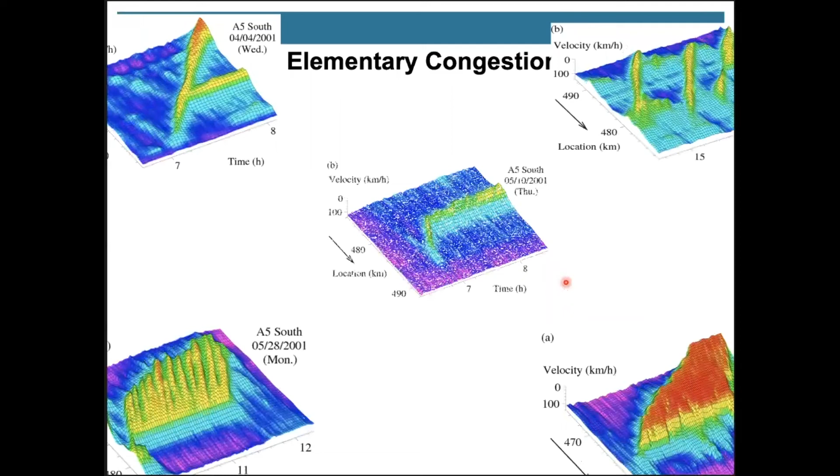Right now, we're summarizing again those congestion patterns, and it turns out that all those congestion patterns can actually be reproduced with relatively simple traffic flow models, such as the intelligent driver model, but also others. And we can reproduce surprisingly many different kinds of congestion patterns with the same model, even the same model parameters, apart from changing the inflow into the system, both the upstream flow and the inflow through the on-ramp.

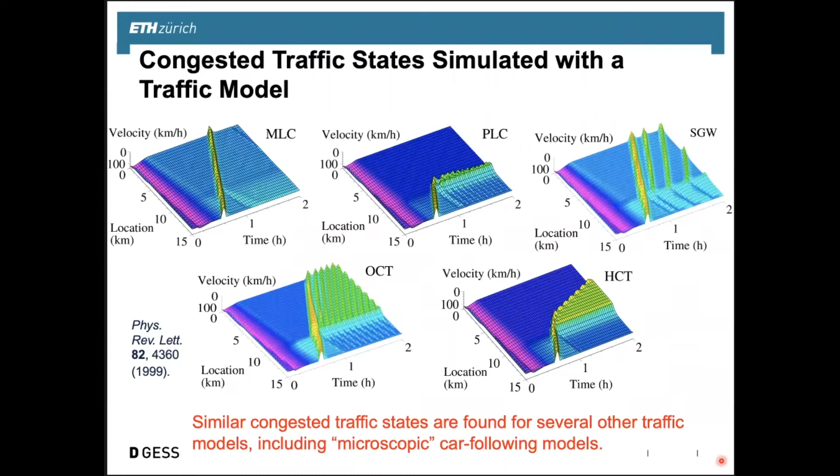And we have also different outcomes for small perturbations in the traffic flow and for large perturbations in the traffic flow. For large perturbations, you can have those additional traffic patterns, moving localized clusters and pinned localized clusters, right? Like what we have just seen with the overtaking trucks in a sense.

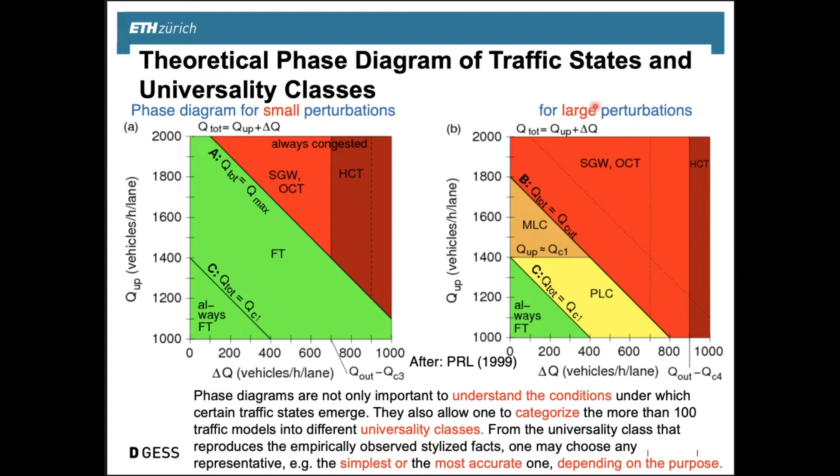So those are predictions, and the fact that for the same flow conditions, we can have different outcomes depending on the history of the traffic flow is represented by the wording that we have a multi-stability in the traffic flow. Okay, there could be different outcomes, in other words.

Now here's one of the papers you may want to look at and maybe even present to the class later on. The interesting point is that there is empirical data, and that empirical data actually fits the simulated data quite well. I should say that the simulation of the traffic patterns occurred before we had evaluated that empirical data, and so from that point of view, it nicely anticipated the findings in the empirical data.

Large and small perturbations. You have small perturbations when there is a little variation in the density along the freeway. If there is a large density compactification at some places, like a platoon of vehicles where there's little distance between the following vehicles, this is a large perturbation, right?

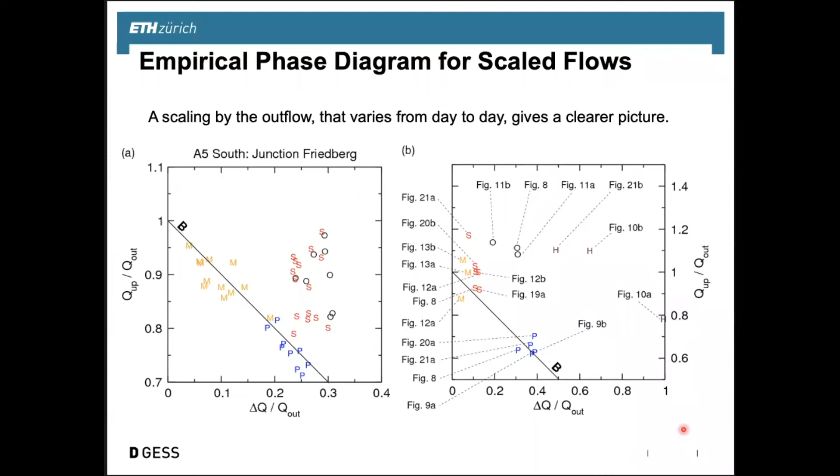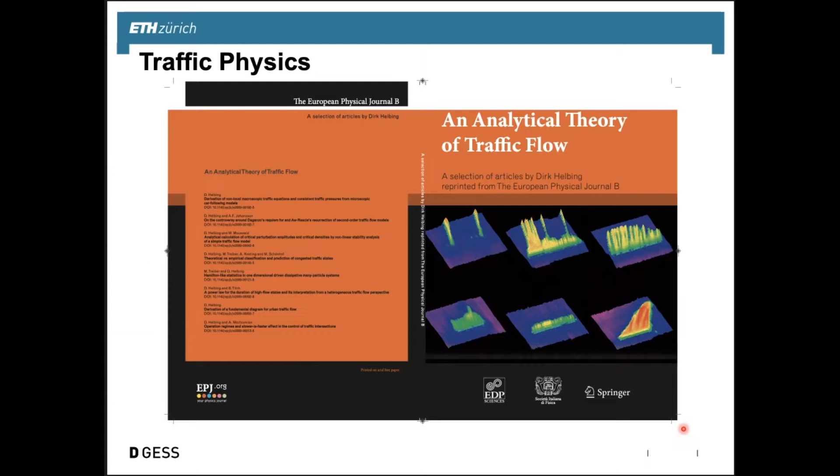Is that clear enough? Now, in the meantime, we can say there is an analytical theory of traffic flow. And this allows us actually to understand many of the phenomena that have been observed and their characteristic features that can be found in the empirical data, and what are the conditions under which what kind of phenomena can be observed. Plus, we can actually calculate the extension of congestion patterns and the associated travel delays, okay? I mean, travel times, in other words.

This can all be done once we know when traffic starts to break down, which is, however, a stochastic process. So we can't anticipate exactly when one truck will overtake another truck, and these kinds of stochastic events will largely determine the moment where traffic flow breaks down. And that's why you want to avoid breakdowns in the first place and delay them as much as possible if you cannot avoid them. And now the question is, how can that be done?

And once we have understood the reason why and how traffic flow breaks down, actually this can inspire new kinds of adaptive cruise control systems. We've developed one also with a big car company, and it has been tested and worked pretty well.

Now, of course, today cars are getting ever smarter. There's onboard data acquisition, something that we could call perhaps perception. There could be inter-vehicle communication. There could be cooperative traffic state determination, which we could call cognition. There could be adaptive choice of the driving strategy, which we could call decision making.

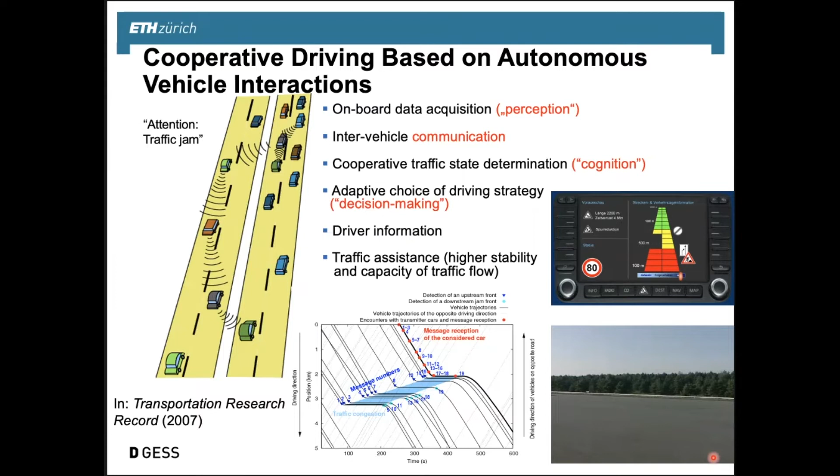And of course, also the driver could be informed, but first of all, traffic assistance would be given, not only to the individual vehicle, but we'd like to create a situation where the traffic flow altogether is stabilized and the capacity is increased.

So over here, we are comparing the normal driving mode of vehicles with a modified driving mode where we change certain parameters by a certain factor. Okay, so you can see that over here. So here the parameter is reduced by a factor of 0.7, or here 0.5, and over there that parameter is being increased by a factor of 2. Now, depending on where you are as compared to the traffic jam, you would have different combinations of parameters.

And it turns out that within the traffic jam, it makes a lot of sense to reduce that safety time gap slightly to increase the capacity. That, however, tends to reduce the stability of the flow, and in order to compensate for that, we'll need to increase the acceleration at the jam front when cars are going out of the jam front.

So you can see, depending on the relative location, there will be different parameter combinations that will be basically decided by the adaptive cruise control system itself. However, the system will need to be able to determine where in relation to the traffic jam the vehicle is actually located. Okay.

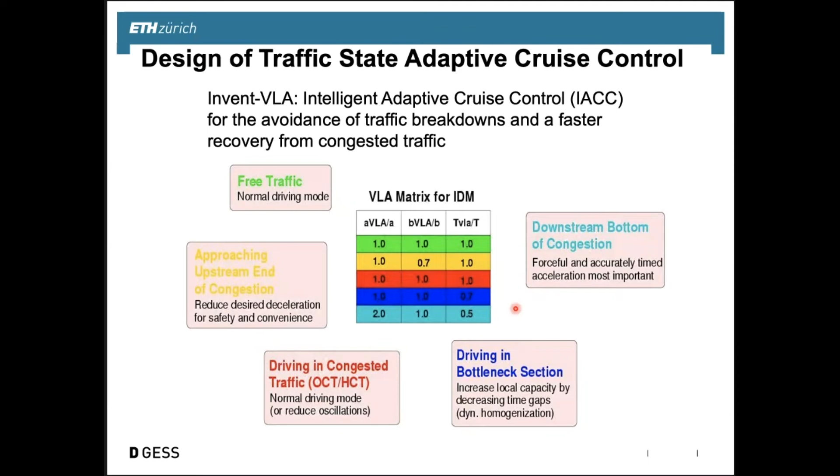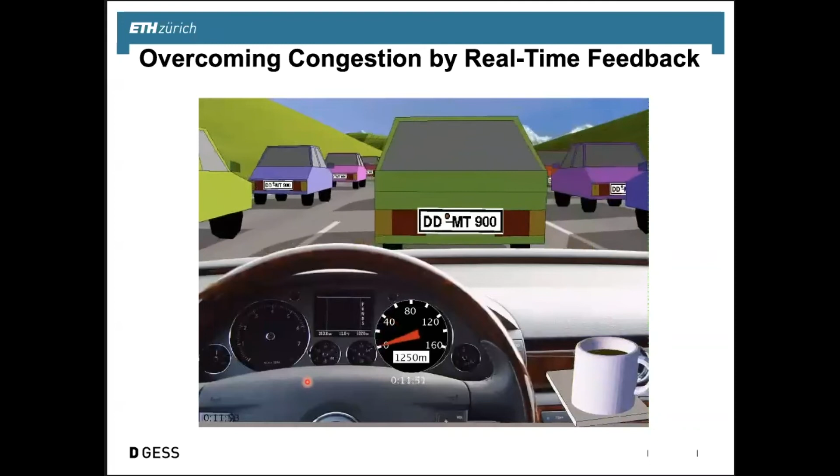Now, while I'm showing you this simulation of stop and go traffic using the intelligent driver model, to show you that we can understand the kind of problems that we have on our streets, I'd like to mention that a lot of the cars in recent years, when machine learning and AI came up, have actually taken a different route from what we have done over here, which was basically the idea to centrally control the movement of all the vehicles. And I will show you here that this is not necessary at all. Here we don't have a traffic center.

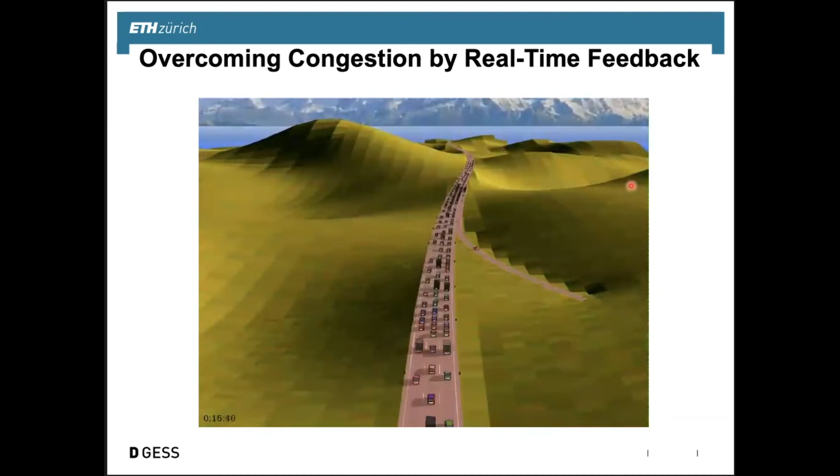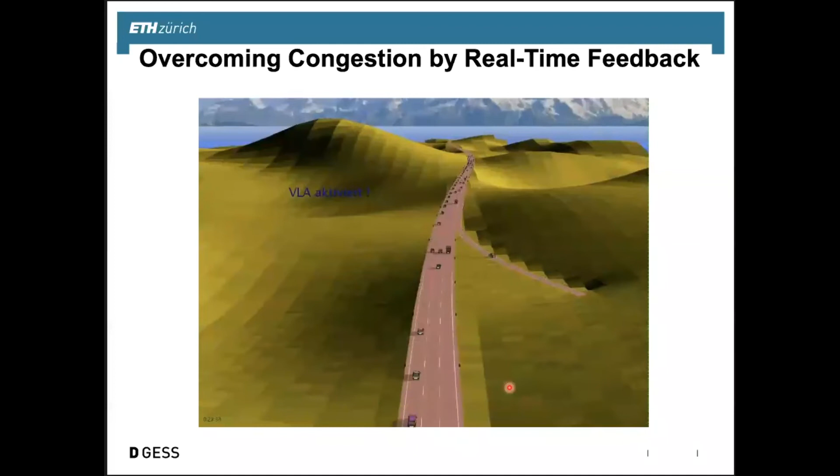First, we have stop and go traffic, which is caused by the on-ramp flow, which we have discussed before. But now we will equip a certain percentage of vehicles with an adaptive cruise control system that measures relative velocities and distances and accelerates slightly differently, as discussed before. And you can see it dissolves the traffic jam. Importantly, we don't need to control each car in detail by a traffic control center over here. Rather, we have changed the interactions between some of the cars.

And as you can see over here, even if only, say, 20% of cars are equipped with that technology, this already has an overall effect on the entire traffic situation. So increasing the percentage of equipped vehicles will dramatically reduce the traffic jam, but you don't have to equip all vehicles with that technology for this to work. It has even more dramatic effects actually on the travel times.

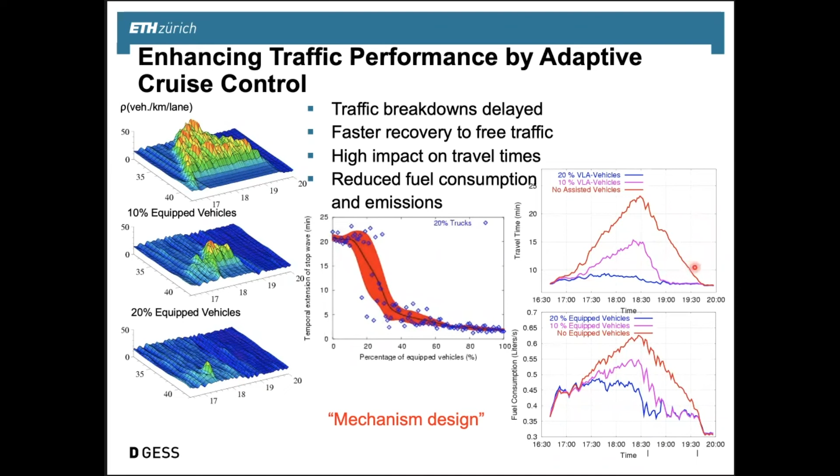Now, how are we doing this? I think, as compared to what most car companies are doing with self-driving cars, it is still revolutionary because it's hard to believe even. So in principle, we are using, say, Internet of Things technology, that means sensor technology that measures the situation in the environment of the car. Not necessarily do we need a lot of sensors. And then based on real-time data, we introduce a real-time feedback, and thereby we're slightly changing the interaction between the vehicles, some of the vehicles at least.

Now, traffic jams turn out to be the result of self-organization between vehicles, but it's an unfavorable self-organization phenomenon. However, we've seen that there are many different possible outcomes of self-organization, right? Such as different kinds of congestion patterns, but also we can understand free traffic flow as a self-organized outcome of the interactions between vehicles. We just need to have the right kinds of interaction. So basically, we're changing the interaction slightly to change the overall outcome of self-organization in a favorable way. So with the Internet of Things, we can now make self-organization work 250 years after Adam Smith's invisible hand concept.